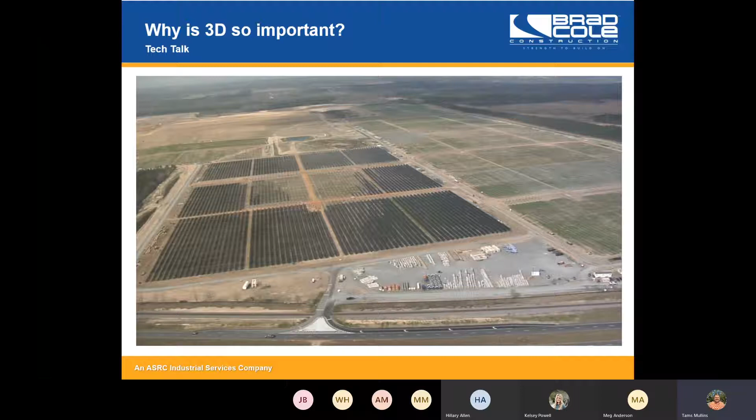So why is 3D technology important to us? This is a little video that was made before I came along, when Brad Cole was first getting into technology. It talks about how important technology is. I'm gonna stop my screen for just a second. I'll come back to it. Hold on one second. Okay.

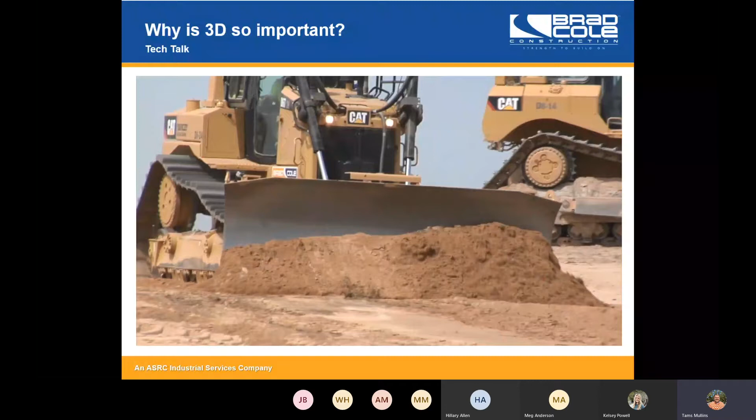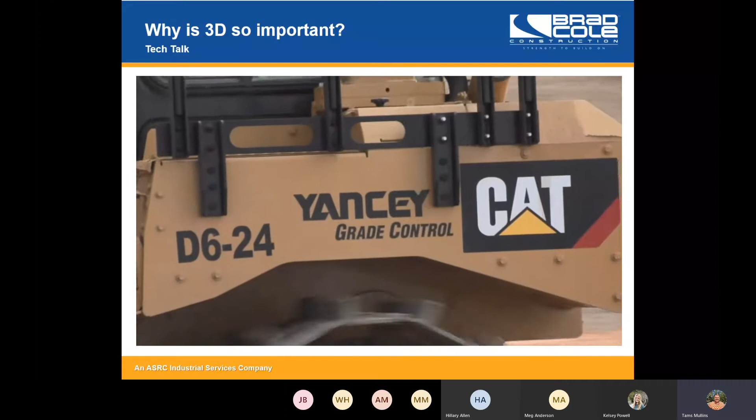This is Taylor 3 solar site in Butler, Georgia. I have approximately 18 pieces of equipment, 35 men. We're building a solar site. It's 800 acres, 5 million yards of dirt to move. This is a sustainability project for a greener America. One thing that sets Brad Cole apart is that we take safety very seriously. At our company, safety is a culture. GPS grade control has really helped us on this project by allowing us to establish those grades accurately and more efficiently. Cat's integrated grade control has taken another exposure out of our day in taking down that system and putting it back up.

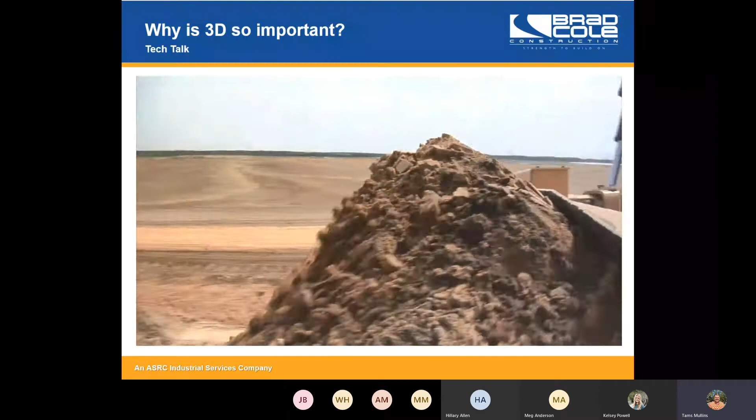You don't have any vandalism because there's nothing outside the tractor to be vandalized. I went to the demo. I asked our salesman, I said, where's this tractor going when it leaves here? He said, we're probably taking it back to the dealership. I said, I've got a lowboy on the way. It's going straight to our job.

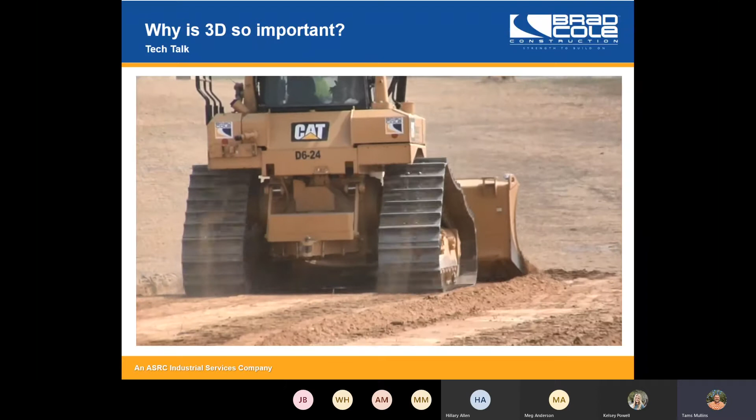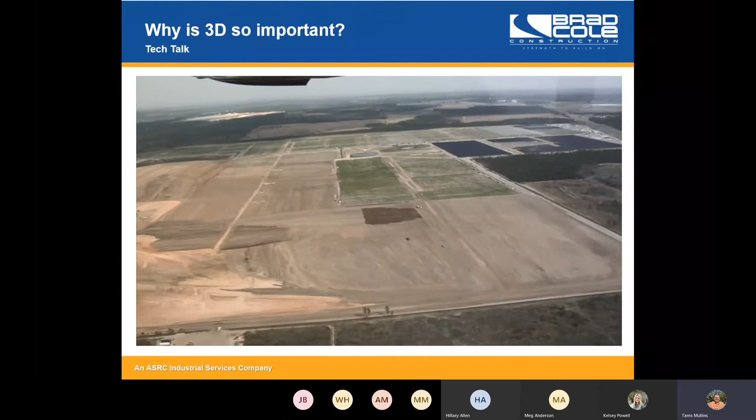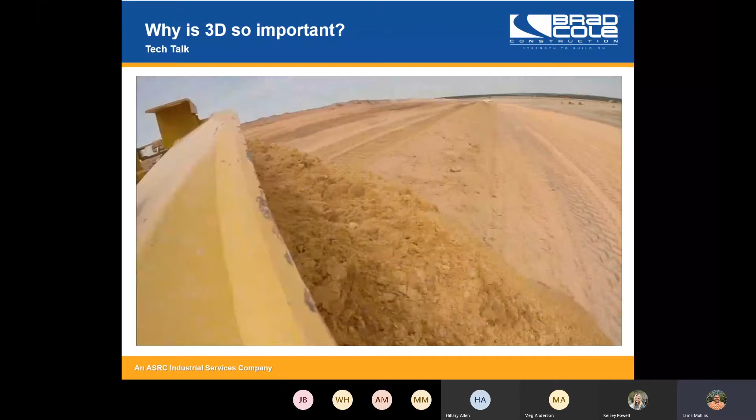We have several D6Ts. We found that they are a stronger machine. It does so much more, so much faster. We love the 3D. It's so easy to set up. We have to produce a good product, a very high tolerance, on a very tight schedule. Client specifically has come to us and told us that we are not the typical grading company. Tolerances when they come in and check behind us are on grade. They have commended our ability, and a lot of that is due to the machinery and the grade control that we utilize.

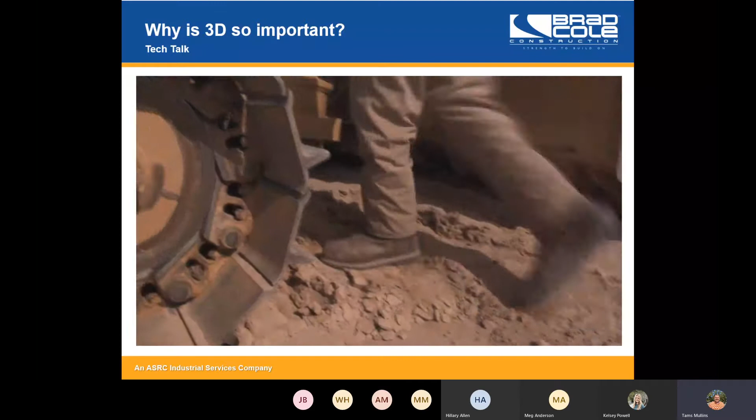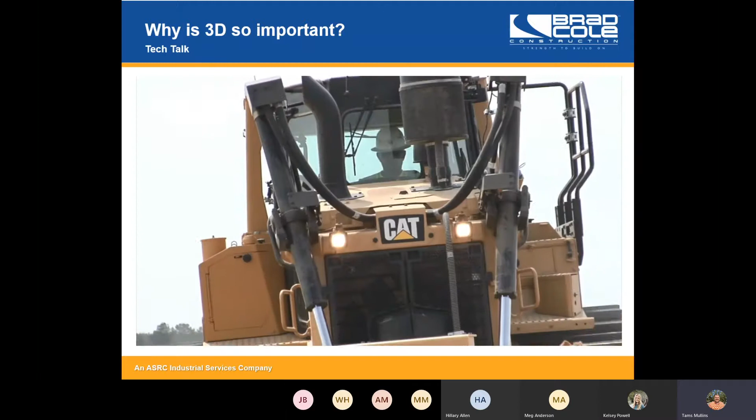Operators really like it whenever you put them in a nice piece of equipment. It's comfortable, you get more production out of it. It just makes a happier operator. A happier operator uses more production. The operators love it really because the screen sizes are bigger. Also, they've made the screens touch screen. You don't have to sit there and go through the buttons and all that. You can do it right on the screen.

Having GPS technology allows us to be more competitive. We're actually slated to complete this project about 45 days early. That translates into better product, but more importantly, a satisfied customer. We're working smarter, not harder.

So that's just a look into why we're using technology today. The three main things out of that video: one is safety. Like Ron was saying in the video, not having to take a system on and off is very important, but to be able to keep people away from the equipment helps us stay safe, and injury is not something we want to happen on site. So being able to keep our grade laborers and our surveyors away from equipment, allow the equipment to run by themselves, just keeps us safer.

Also, the accuracy. The GPS is a lot more accurate than a human can be on grading. So in the past, we would lay out grade every 25 feet, 50 feet for them. They would be perfect at that spot where we gave them grade, but in between they would be either a little bit higher, a little bit low, where the GPS technology allows us to keep it consistent all the way through and keep it on grade. By doing that, we can cut our costs with material savings, our time. As you heard Ron say, we were 45 days ahead of schedule on that project, so saving time saves us money. And if we don't have to go back and regrade something because it was off, that's just more time savings.

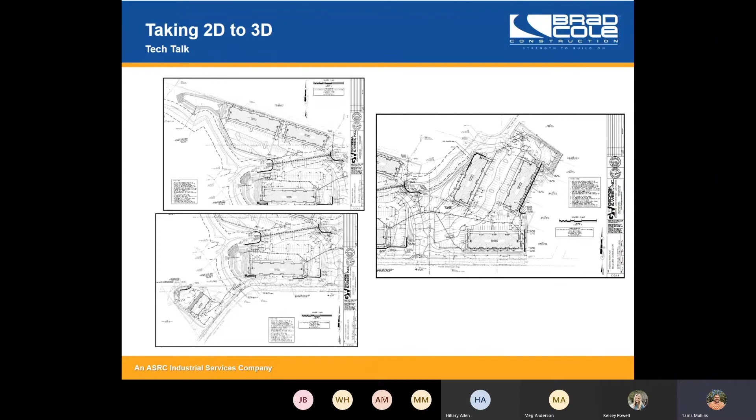So what I do is I take a set of plans from an engineer, like you see here. Those plans are two-dimensional, so it's just line work on a piece of paper that has grade markings, contours, and things like that. I take that data and I convert it into a 3D model. So I can take those images you see up at the top left and stitch them together and make one image from it. Bring in the AutoCAD line work from the engineers and be able to have that line work elevated. And then down here at the bottom left, you'll see it's a 3D surface of what we have to build there in the field.

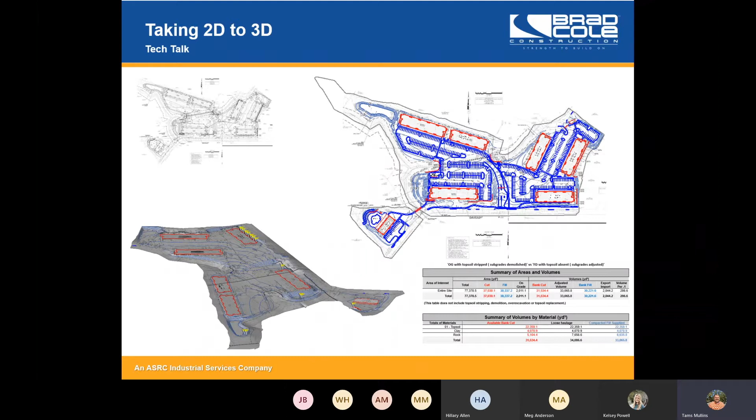Once I have that 3D surface, we get what our quantities are for that project, how much dirt we have to move, and where we have to move it from and where to. So that's the first step of what we do, taking the engineering's 2D stuff, creating a 3D world out of it so that we can build that project.

Our surveyors in the field have a software. It's called Trimble Siteworks. This is the newer version of SCS900. It allows them to know where they're at on the project, how much dirt needs to be moved into that area or taken out of that area, what the elevation of that spot should be and what it is currently. So it gives them a view of what's happening on site. We also use it to lay out our storm, our curbs, anything we have to lay out for other trades.

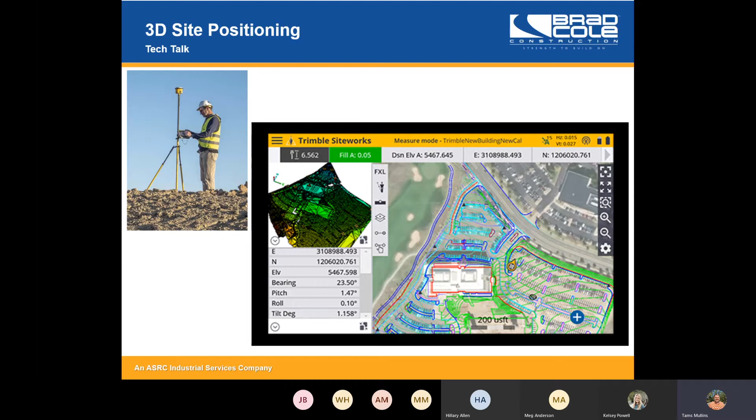And then we move into machine control. And this is a video, but I'm going to talk over it, so I turned the sound off. It's easier to see this stuff in videos than it is to do just pictures of it. This is a new Trimble Earthworks system.

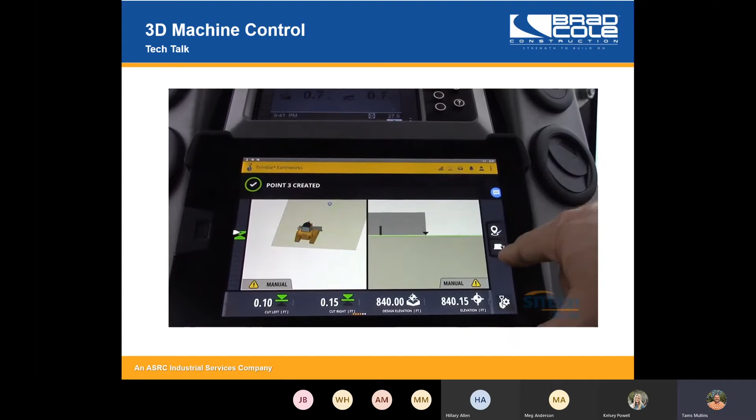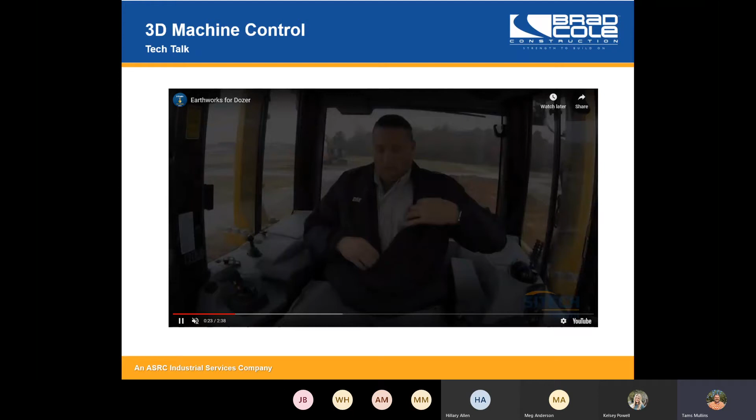As you can see, the screen gives them great information down here at the bottom: what design elevation is, what they are, where the machine's at. They can see it on the screen. But what's real nice about it, and you'll see, I don't know why this guy's got to zip his jacket up in the video, but I guess he was cold.

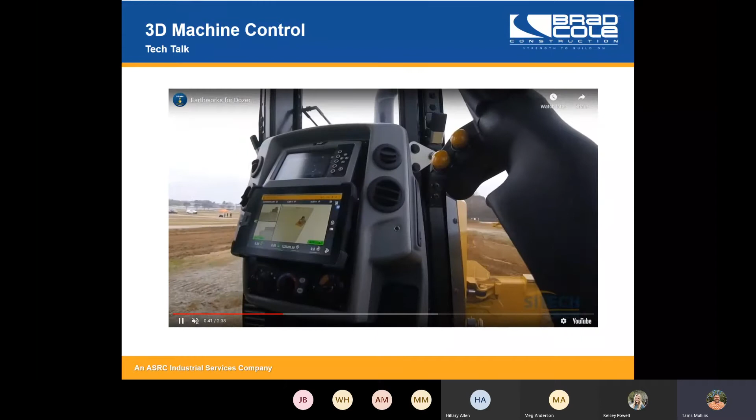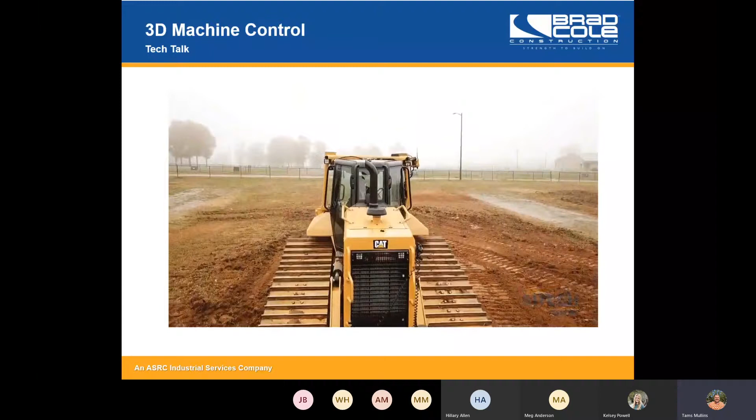But this joystick down at the bottom controls the blade of the machine. It lifts it and tilts it left or right so that we can grade the dirt the way we need it. You'll see he just pushed the button. Once he pushes that button, the GPS system takes over the blade. So the blade raises and lowers, tilts left and right to make sure the dirt's being graded the way it's supposed to be.

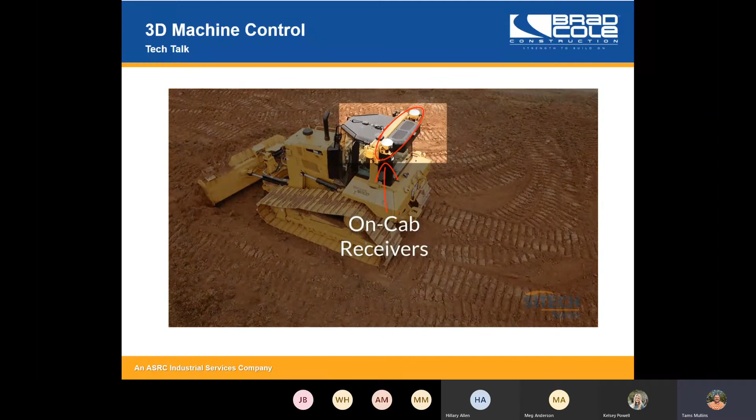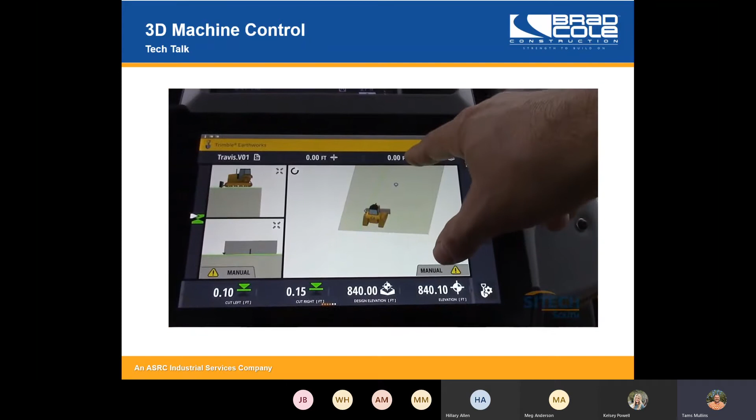The reason that all that can happen is because these two antennas at the top of the dozer are collecting the GPS information. They compare it to one another. And then there's a bunch of measurements and sensors carried out to the blade of the machine that tells the system where that blade is. So the operator can go through the screen and change how far up or down the surface needs to be.

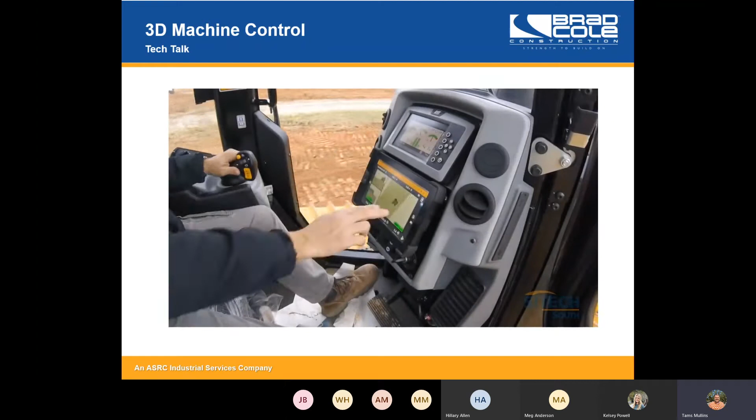And then you can see here, he's grading right now. He's not even touching that joystick. So he's not having to do any input for the blade itself. He's literally just driving the machine, and he can focus on people around him. He can look, make sure he's grading correctly.

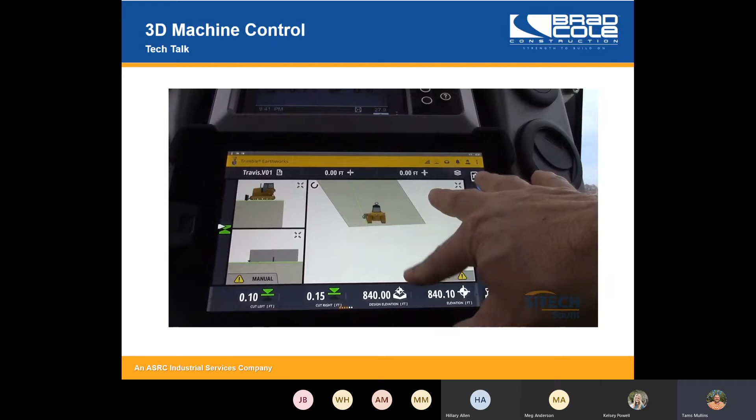As you can see, he's kind of dialing into the surface and looking at what the end product should look like. And it really allows him to have more control than just what somebody would give him in the field. In the past, there would be a bunch of stakes. He'd have to read them and know what's going on. So that's the machine control that we do. So let's go to the next slide.

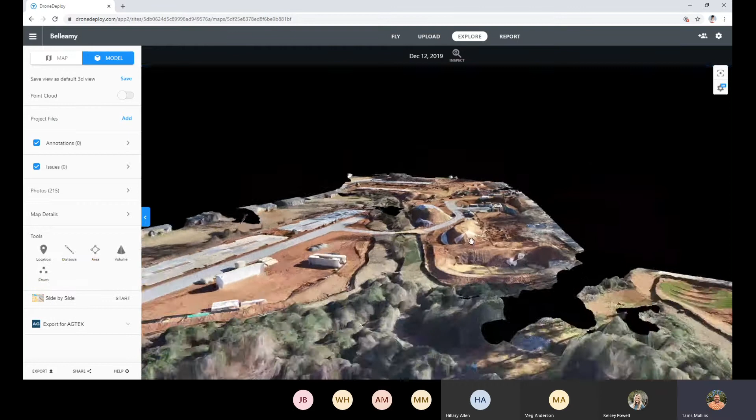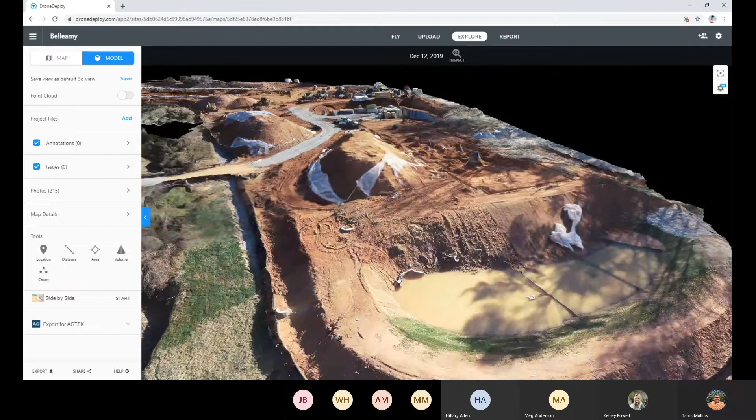I can turn and look at it in 3D. So we can come in here, look at how the site's being built. We can see some extra dirt that we've got piled up. We can see in our ponds that we've got our skimmers in, our baffles in, this head wall for the storm drains coming in. So we can use it for some inspection tools, but I also can use it to come in here and calculate volume.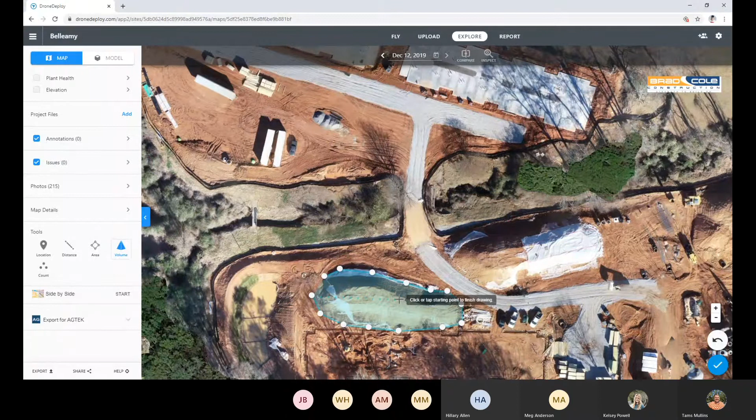So I want to know the volume of dirt that's in this pile here. I can quickly go through here and measure around this pile, and it gives me how much material is inside that pile, so that I know that material needs to go somewhere and how much is there.

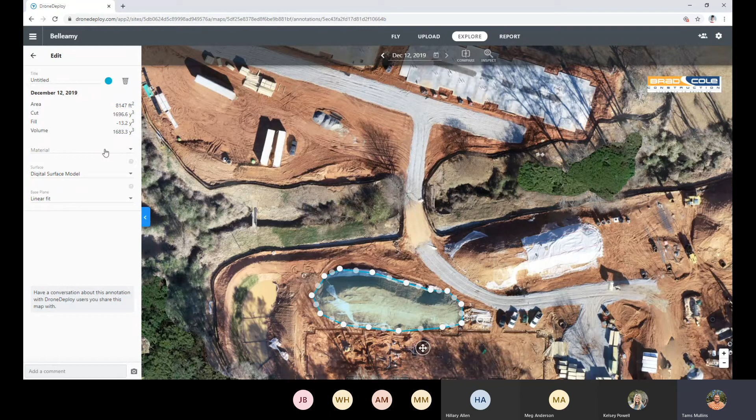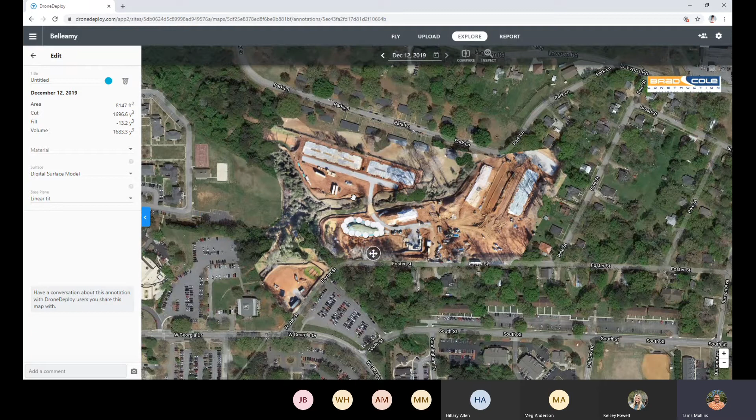And then we export all this data out as a point cloud that I can bring into the software that I built the 3D model in and get quantities and know how much work we have left to do for progress and things like that. So that's our drone data information. Jump back over to the PowerPoint.

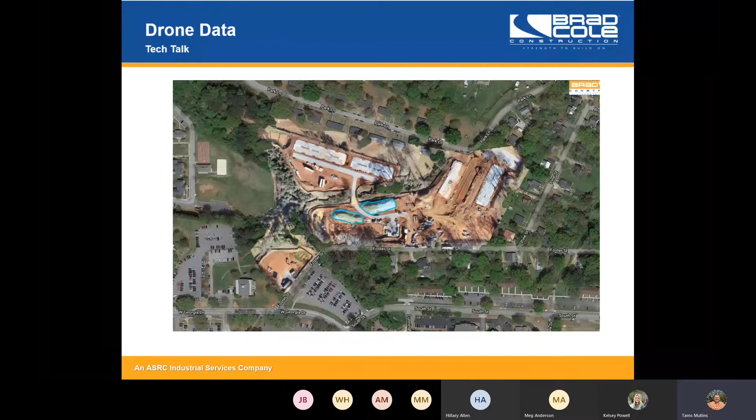So what's new? What's coming? The one thing I wanted to touch on and give y'all the idea of is construction's not playing in the dirt anymore. Even though it's something we do and we enjoy, it's not about just the big equipment pushing dirt around. Technology has really taken over the construction industry. So this is a new product that has just come out. I'll play it so that y'all can see it in action.

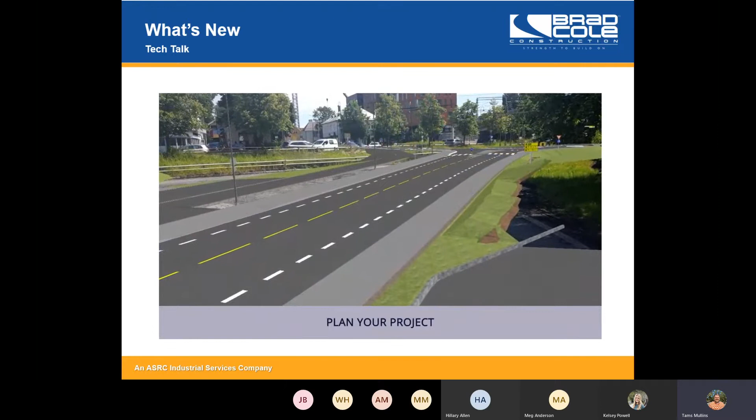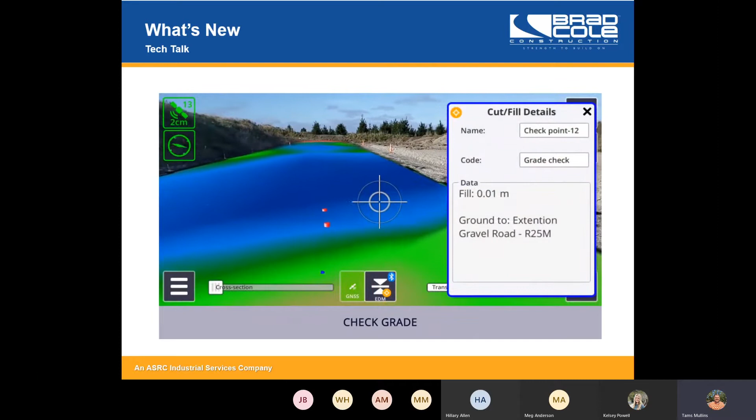This is a road that work's about to be done on, and you can take that 3D model that I would build in the office and load it into this system, and be able to walk around and see a virtual reality of what that new surface or new site is supposed to look like. And you can see these little red tags where you can measure how much material's left to do, and then you can type up work orders or instructions for a to-do list and send it out to people.

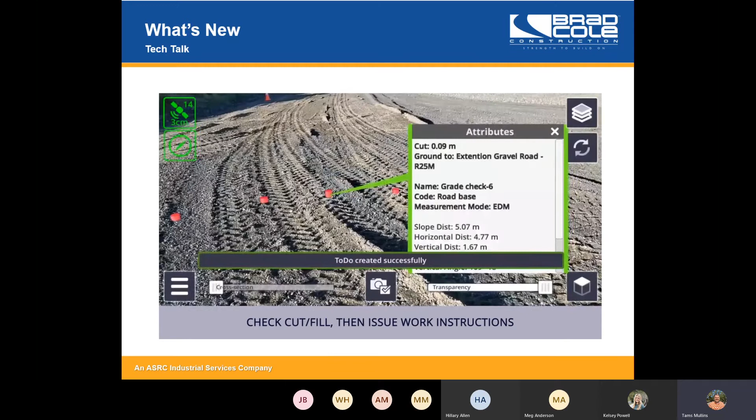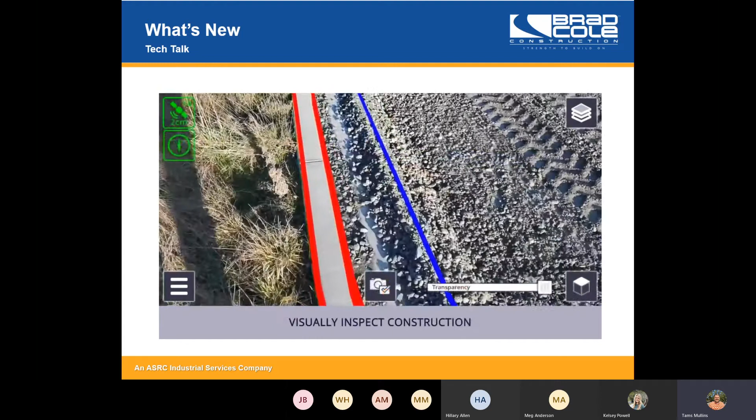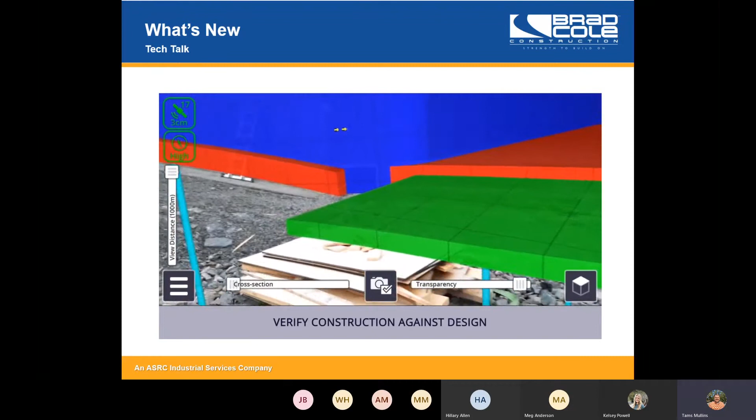So there's this whole connected site, connected world going on in construction that, I would say, in the next 3 to 5 years is really going to explode. This is showing a curb that has to go in, storm going in 3-dimensionally. You can see it being installed and what it's supposed to look like. So really taking that virtual reality world and bringing it into the construction industry. This is one example of it. Something simple, tools that can be used in the field to see what's being done.

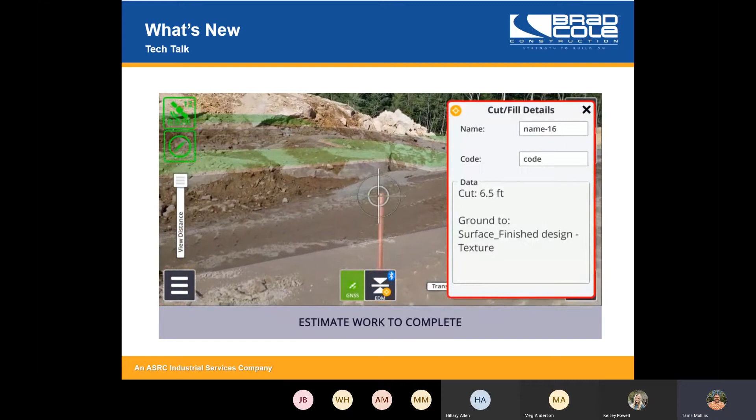And when you see what the tool looks like, this is using a phone and a little GPS receiver. So that's what it looks like. It's just a little phone. You can use your phone plus the software, or the little GPS receiver. And then this is the latest and greatest. Trimble released this a couple years ago, and it's really starting to hit the market now.

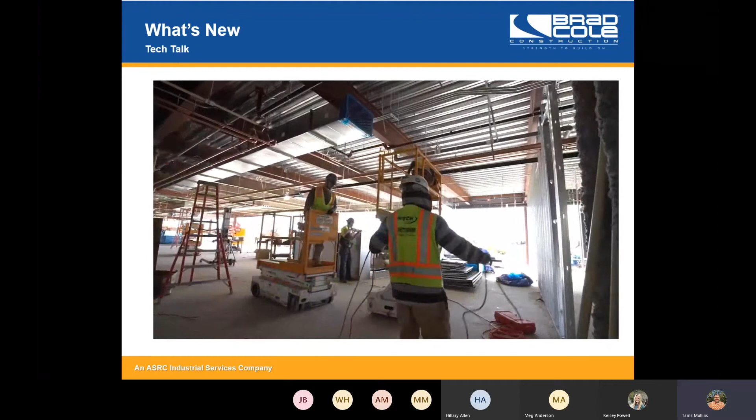I'll play it again. There's no sound. I'll turn some sound on a little bit, but these guys look kind of funny in the beginning because they're just wearing this funny looking helmet with these glasses on it. But it's Microsoft's new HoloLens technology. So I don't know if any of y'all are familiar with BIM modeling or anything like that, but you go in and build your mechanical AC ducts, sewer lines, water lines, all that into a 3D model. We would use this in the dirt industry as well, kind of similar to that one before it.

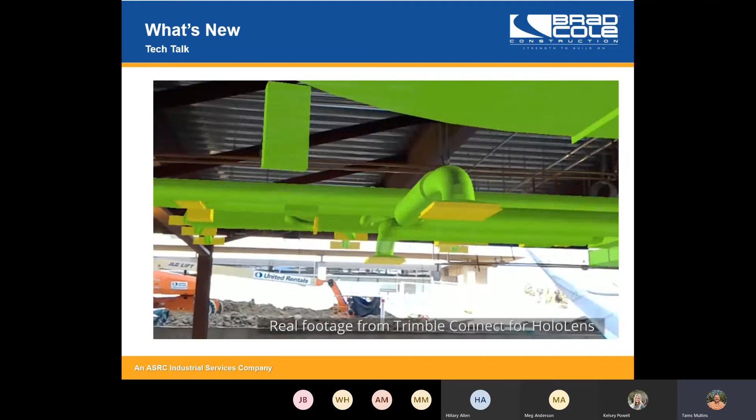But while you're wearing this helmet, you can see this guy, he's like pinching and doing things like he's on a phone, but he's not. And you'll see here in a second that he's seeing something totally different than everybody else. So this is what he's seeing. He's seeing all that information of where those structures and things have to go. And so he can kind of see if things are clashing, if things that are already installed are going to hit what he's supposed to put in.

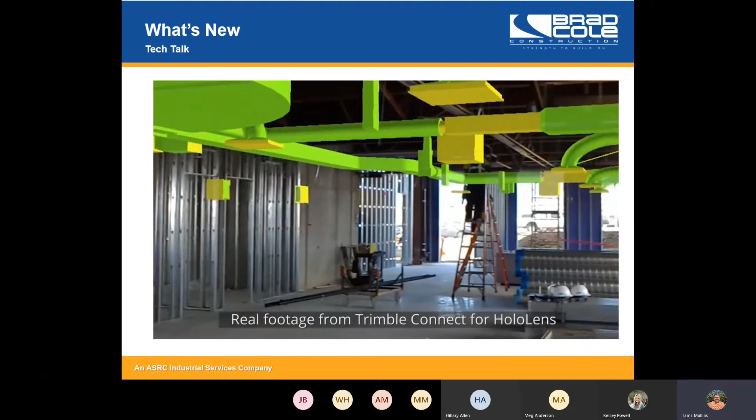And then the future of this is, as we advance in the construction industry, to take as-builts of what we have done and put it back into the system. When this building is finished, you should be able to go through with this technology and see where those ducts are, where the piping is, so that if any remodel work needs to be done, you know where it is, so you can kind of x-ray or see your way through that wall with that technology. So it's just kind of where this industry's headed.

I started doing this in, like I said, 2007. And the days of being able to put on a hard hat with a pair of glasses and seeing pipe, or walking around with your phone and a little GPS unit and seeing grade and stuff, was not even a thought. There's technology out today that in 2007 I thought there's no way we'd ever do something like that. There was talk about it, and people would laugh and say, there's no way they could ever do that.

In 2020, once we get past the coronavirus, we're going to be doing this. This is technology that we're going to be implementing. A lot of this stuff we're going to be implementing at Brad Cole over the next few years. And that just means we're going to have more emphasis on people who can manage technology in the construction industry and know how to apply it. That need's going to grow as much as needing a project manager or superintendent. So that's really all I got today.